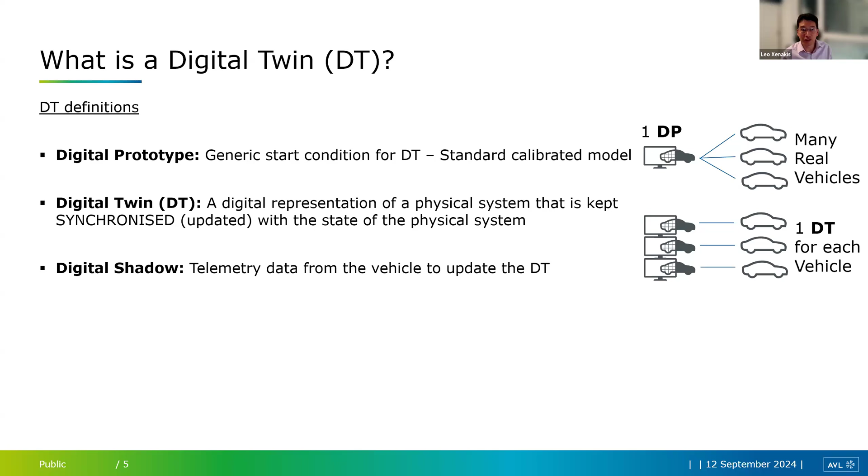And what allows this digital twin to stay synchronized with the physical vehicle is the digital shadow. This is the name we have for the telemetry data, which comes from the physical vehicle and is used to update the digital twins, keep them synchronized.

It's important here to just differentiate how we use this data that comes from the vehicles. I've kind of broadly split them into two. This is online data. This is the data that is used to perform predictions based on the current state of the vehicle. So if you want to know the current state, it's like a live link to the vehicle. And then there's historical offline data. This is used to update the parameterization of the calibration of the digital twins.

And we'll see in a bit more detail what the different steps are to get to these and how this data is used. But it's important to understand that there is this online data which is coming sort of streaming from the vehicle and is used essentially immediately to do calculations. This is like the inputs to any particular model in terms of time. And then the offline historical data, this is used to update the parameterization, or what's possibly called the calibration sometimes, of these models.

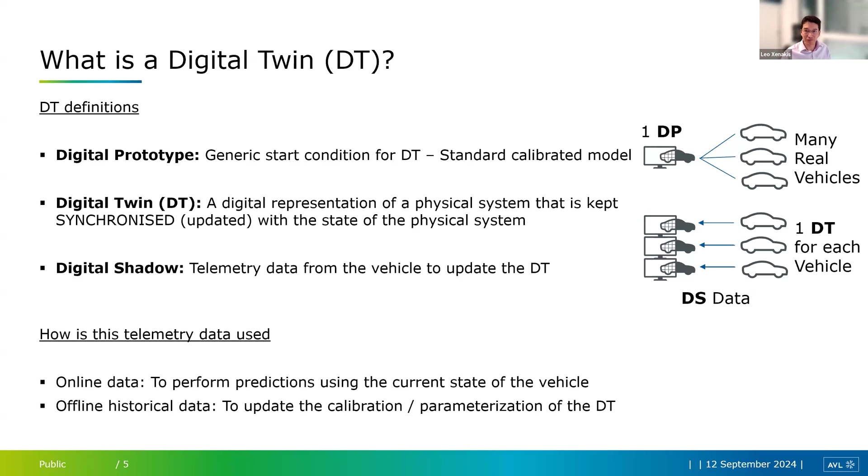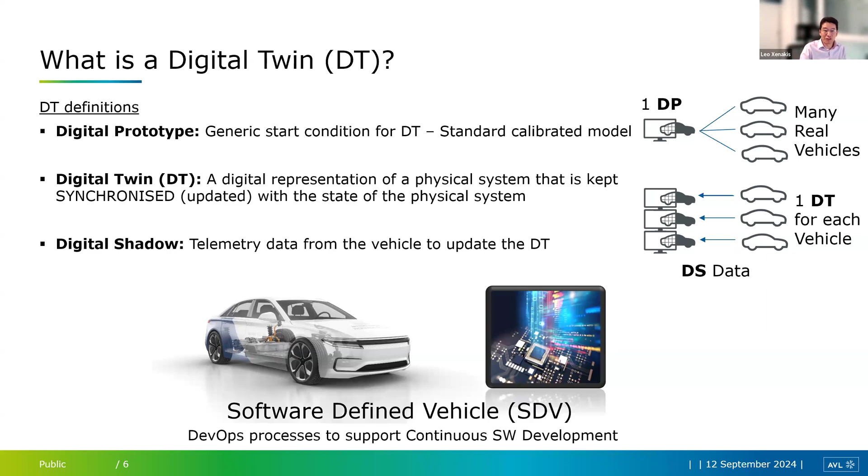And I have to mention here that this software-defined vehicle is really forming the backbone of a lot of the technologies, particularly the DevOps-related technologies, which allow digital twins to exist. And the reason for this is that this continuous updating of the software is essentially what forms the backbone of what digital twins need to be able to do. They need to take data from the vehicles and then update themselves. And this needs to happen automatically because there could well be thousands, millions of vehicles. There can't really be any manual steps in this process.

So now that we know what they are, why are we even interested in digital twins? For the purpose of this presentation, I've decided to split it into two. These fast digital twins are used for future prediction, and these high fidelity digital twins are generally used more for detailed investigation. So let's have a look at those.

The fast ones, at least in our case, are generally 1,000 times or more faster than real-time execution. Accuracy, well, we have got better in this case, but better than 5% is probably a good target. And it's generally used to predict key variables of the vehicle in the future, either for control or for management. So use cases here: look-ahead controllers. We have an example of a thermal system developed by AVL here. Drive rate is another one.

These are ones where you want to look ahead and possibly look at different strategies for the next 5 minutes, 10 minutes, and maybe simulate several of them and choose the best one. And of course, this can be done on a fleet level as well, where you have management prediction algorithms. This could be, say, taking 10 vehicles of varying ages, maybe even different specifications, 10 different delivery schedules, and seeing which one is most efficient. And of course, it can be used to predict component failures or readjust maintenance schedules, reduce downtime, all these things for which the state of the current vehicle needs to be known.

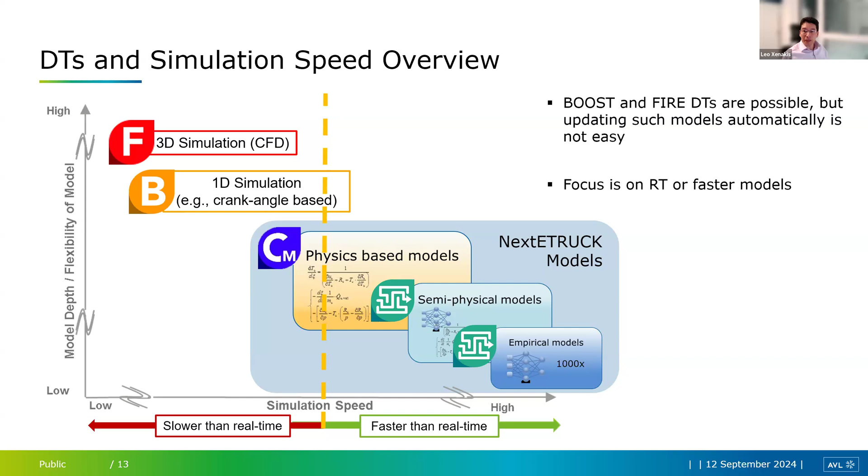Quick clarification. There's a misconception that digital twins need to be a full model of the whole vehicle, and this is absolutely not the case.

Digital twins need to only have enough fidelity, execute fast enough, and model only the systems and outputs of interest to be useful, right? So this is no different from the models that you probably currently use already. So in terms of development timeline, where do digital twins come in? Where do they fit into the overall picture?

So we start with the system definition. Hopefully you already have systems in place that do this, SysML. And then we talk about the digital prototypes. Again, this is probably close to where you are already, or what you have been doing traditionally. And for most OEMs, we really want to start using digital twins already before we go to production. I think if you've done any amount of testing on real vehicles, then even keeping track of what's happened with these vehicles and what software is on them, this can be a nightmare.

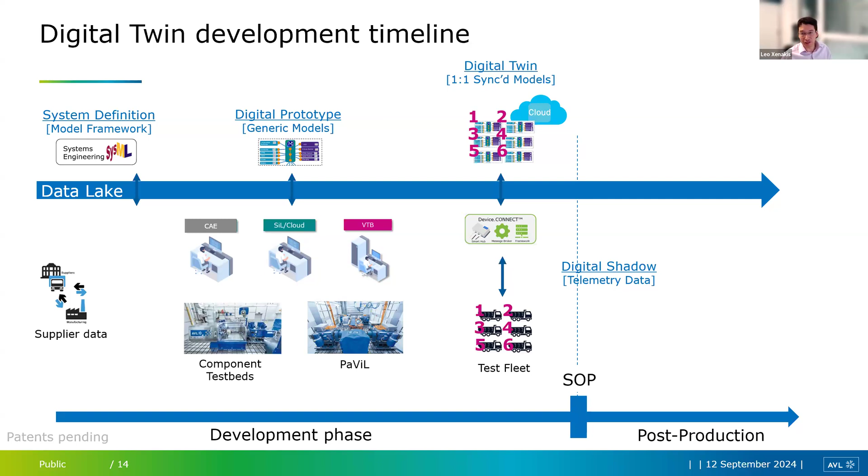And actually, if you have the framework in place to deploy digital twins, you can do things like, of course, look at the full history of the vehicles, have pipelines in place to already test in software or in SIL or HIL certain components, updates to calibrations, updates to software, all in the cloud before, and then have them deployed directly to the vehicles. Again, if you have this capability in place.

And then, of course, once you get into production, you have the ability, both from the OEM side and maybe as a service that you could sell to the end customer, to have a better overview of the state of each of your vehicles, and to do all the things that we talked about in those use cases.

Could you maybe explain the abbreviations that we have here in the middle of the screen? CAE, SIL Cloud, and VTB? Okay. CAE is computer-aided engineering. You could just say this is basic CAD and all the simulations related to the more complex, so maybe more 3D, 1D type simulations. SIL Cloud is software in the loop. It's cloud-based testing. Again, if you want extra compute, you can push a lot of these complicated calculations into the cloud. VTB is virtual testbed. This is a product that we have here at AVL.

It's basically a HIL. I've got component testbeds, I think you understand. This is a powertrain vehicle in the loop. This is where you have usually 4 dynos, maybe one simulating certain parts of the powertrain here at the front. And sometimes you can mount the whole vehicle, or you can just mount maybe just a high voltage component, whatever it is, and you can have independent control over the 4 wheels. SOP is start of production, I think.

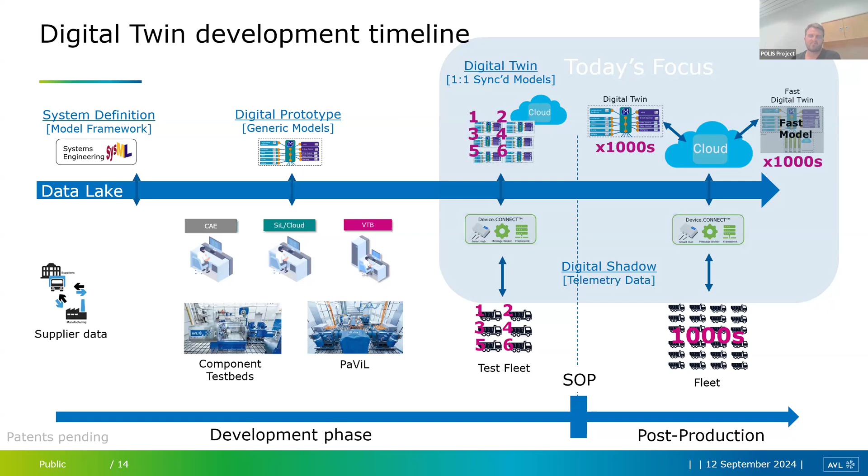Okay, those were the two questions. I think then there are no further questions, so I think you can continue to talk a little bit about our project, which is good.

Okay, so this is a 4-year project. We're about in the middle. 18 EU partners, fluctuates a little bit, as we'll see. We had 3 live demonstrators planned for 6 months at the end of this. I've grayed out Tevva here because, as you may be aware, unfortunately they went bankrupt a couple of months ago. We are looking for another partner to fill this spot, but as of yet, I don't believe we found one. And any new hardware or software required for these demonstrations is being developed in the 3.5 years previous to the demonstrators running. As part of this, a digital twin development framework and a full fleet management framework are being developed as well.

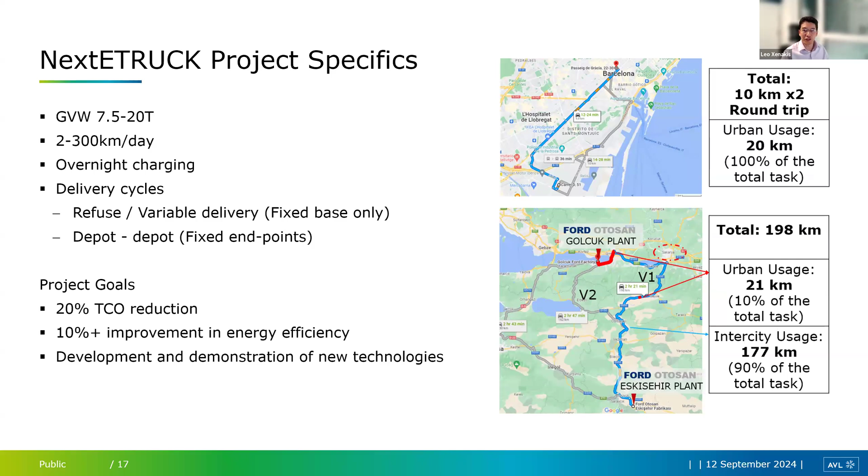Leo, I just need to interrupt you quickly. We are not seeing the mouse all the time, so maybe you can refer to the colors or use some kind of pointers or something. Yeah, that works. Here we go.

I think what you could mention also is that the situation in Barcelona with the refuse collection is not really what you would call a standard garbage truck that you see in cities, but these are large pieces of old electronics, for example a fridge, and the route is basically not fixed because the vehicle is going from the depot to collect the items and then returning again.

So we have varieties, and also, if I'm not mistaken, the trips between the two depots in the functional urban area of Istanbul are also not always the same, but fluctuating, because we decided to alter the route, even though the origin and destination of the truck are always the same. They will take different routes in order to gather further data. I'm not 100% sure if this has been clearly stated, because it is quite important to look over a longer period, and also to factor in the climate situation.

Even though Istanbul has a Mediterranean climate and we don't have huge fluctuations, at least we will see a difference between the start of the pilot, if it starts on time, which will be during the coldest months, and the end in the summer next year if we keep our current schedule. I think this needs to be mentioned briefly, so people have a better understanding of how these trucks will operate in the real world.

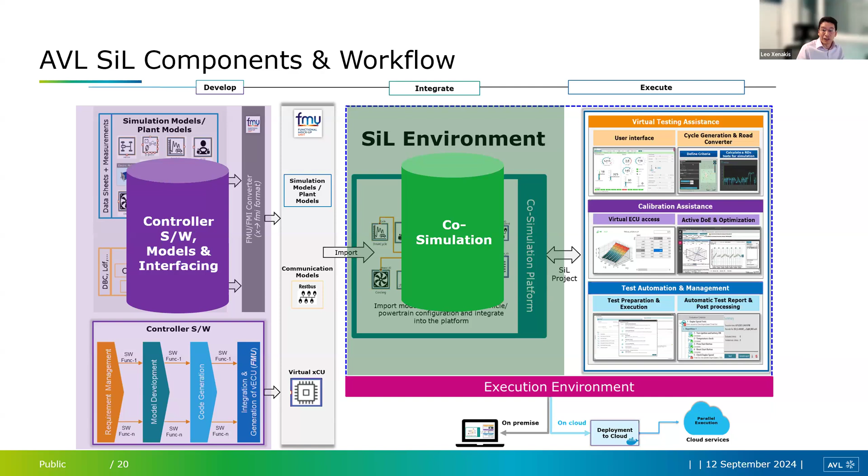And for any system like this, you also need a layer on top, which is really using, I suppose, an automation framework and also a management framework in order to be able to deploy the correct tests to the correct environments. And we see this down at the bottom. We need to be able to deploy on-premise, also into the cloud. And at least the AVL systems, they support this.

So this is where we get into a little bit more detail about exactly what the workflow for NextETRUCK is going to be. So here at the beginning, we're looking at model creation. We use MATLAB for the controllers in this case and CRUISE M for the vehicle components. We'll get a nice demo probably next time, as we're running a little bit over.

But essentially there are standard components of most vehicle types available, including for hydrogen, so fuel cells and this sort of thing, so you can quickly pull together models of the vehicles. And in this particular case, we're combining them into FMUs. And the simulation engineers sit essentially between these two.

And the co-simulation environment, this is Model Connect, especially designed with certain useful features that are not available in some of the other simulation tools, including the ability to not have to share some components, but still allowing simulations to run in the cloud with separated access rights.

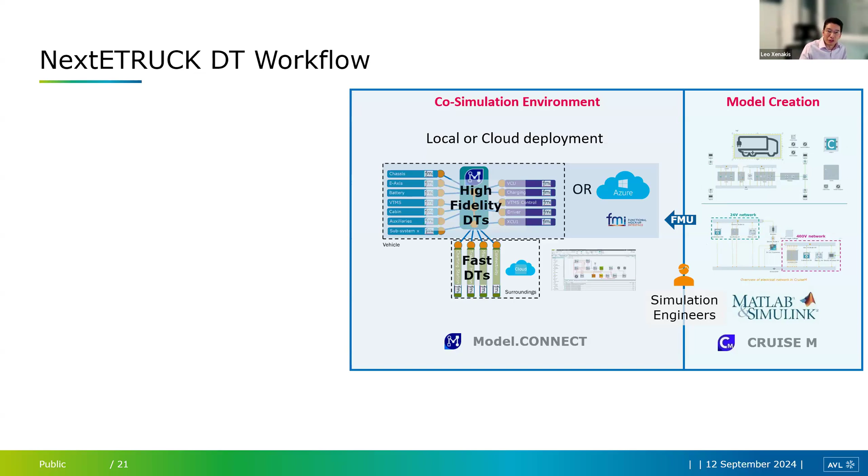But essentially, these are then converted into high fidelity digital twins, and some other tools are used to create the fast digital twins. And these are the empirical or semi-empirical models, the ones that need to run much more quickly. And this can be done very quickly and to some extent in an automated way using the tool Cameo.

And we have two types of management in terms of the parameterization and the models themselves. There are different requirements for each. We'll get into why this is, but I think it's generally accepted now that you need to handle the models and the parameters separately. And we do the model management in GitHub and the parameter management in CRETA.

And here again, we have the end users really only interacting with these testing tools here, so they don't need to see the complexity behind it. I think sometimes it's extremely useful because generally the people doing the testing are not the people making these models and everything. And as we've seen with many customers, just this hurdle of having to install or even think about using some of these simulation tools puts a lot of engineers off, and a lot of models tend to then go unused.

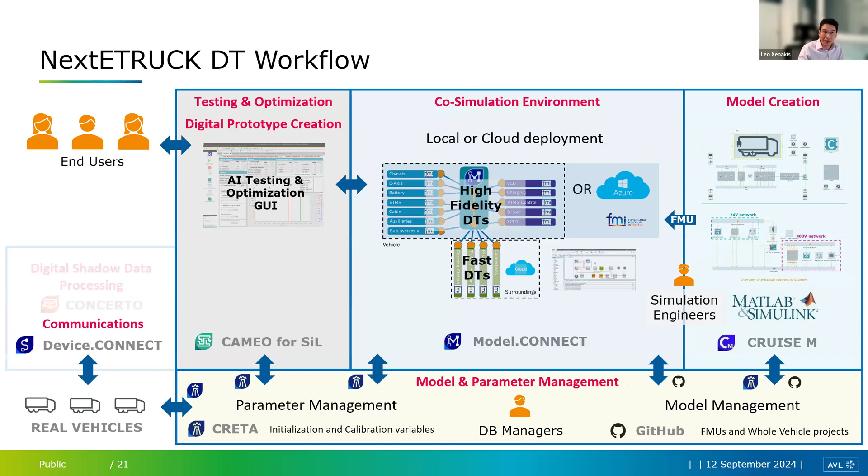So once the vehicles are available, then again, the same places where the parameters are managed can still be used to bring the latest DTs, models, parameterizations down to the vehicles. We have an AVL product, Device Connect. This allows the communications up to the cloud. We use Concerto for post-processing. So this data is taken into the cloud, and there's going to be a lot of it, obviously, and any processing scripts can be automated here.

Again, using the longer term data, we can automate the creation and update of these models with some AI-based stuff. And this isn't a real buzzword in this case. The AI components within Cameo have been worked on for the last 12 years, and this is what allows, with minimal human input or none at all, the creation and update of models. And we'll talk a little bit about this probably in the next presentation, but there is this DevOps pilot program which has been developed together with Microsoft.

This gives you a nice clean interface so that, again, the end users don't need to see any of the complexity of the tools behind. But of course, it's important that each of the tools themselves do have nice interfaces for the expert engineers in each of those areas. But there must be the ability to then essentially automate the workflow that they're using in order to execute certain things.

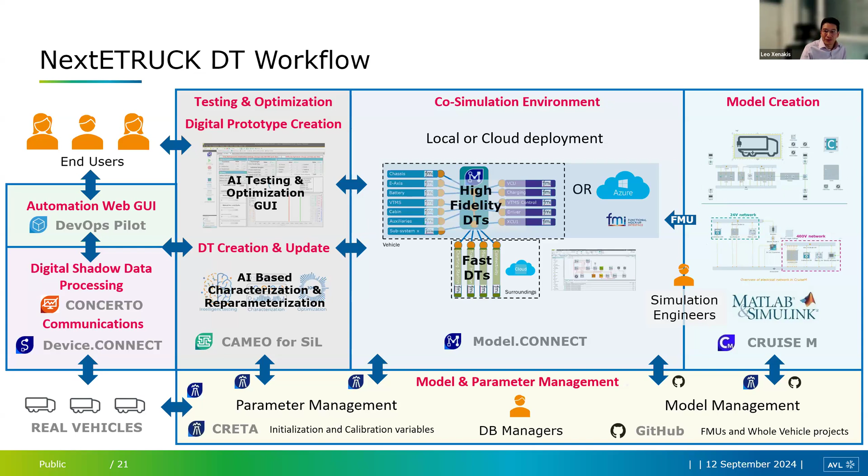So I'd very quickly like to cover, so this high fidelity P2 hybrid truck model is the basis of the NextETRUCK models that I'm going to show you soon. But I just wanted to quickly cover some of the capabilities that we're seeing here, because essentially we don't just cover eTrucks. We have the ability to look at any number of different hybrid configurations.

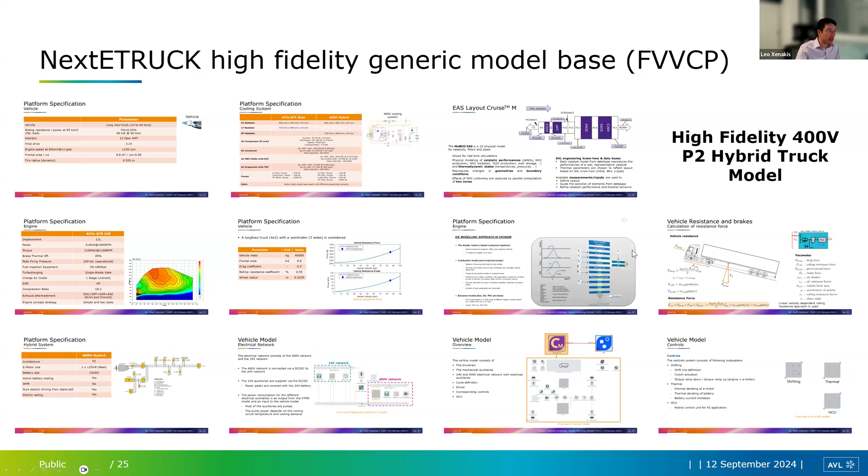And of course, in many respects, modeling engine-related behavior is more complicated and allows for more optimization possibilities when combined with e-motors as well. So many projects done on this, and there's a few screenshots here based off of the demo example. There's a presentation we can link to as well. It was given 6 months ago, where we go through all of the capabilities here, but I'd like to quickly

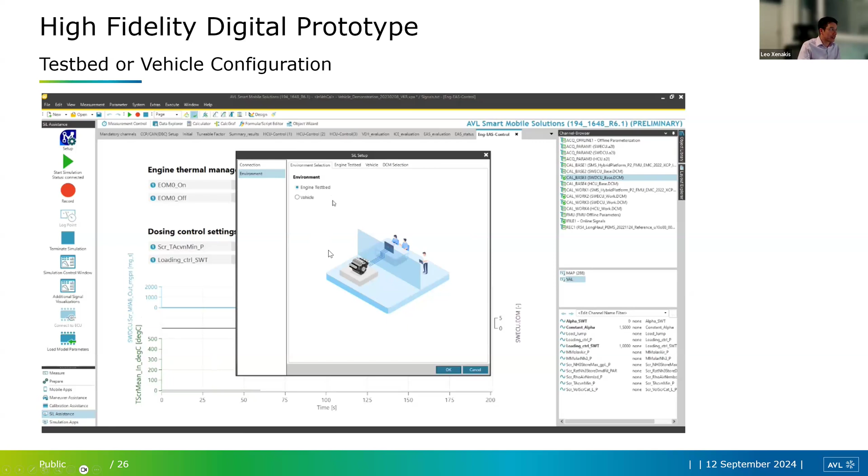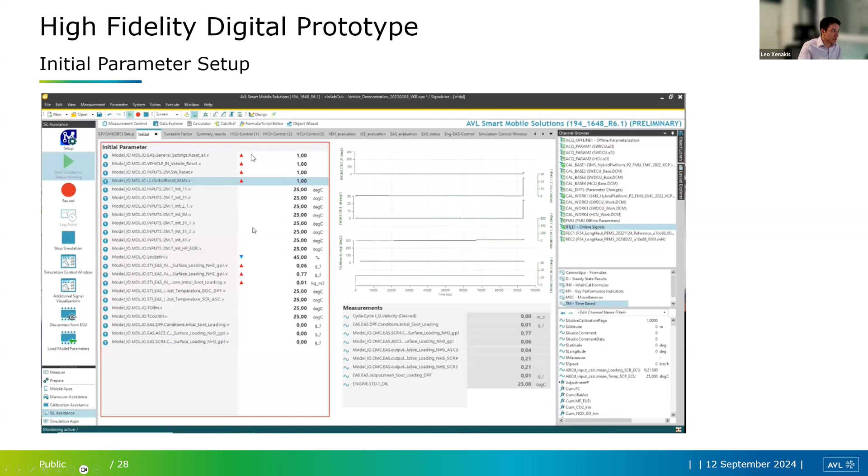just cover that. For example, right at the beginning, you can set the simulation up as if it was running either on an engine test bed or on a vehicle in this case. And again, without opening the simulation tools, you can choose which FMUs are used, or swap them out if you want to, even manually. And here we have initialization parameters for the simulation. Again, it's nice that you can see whether things have been changed from the default values.

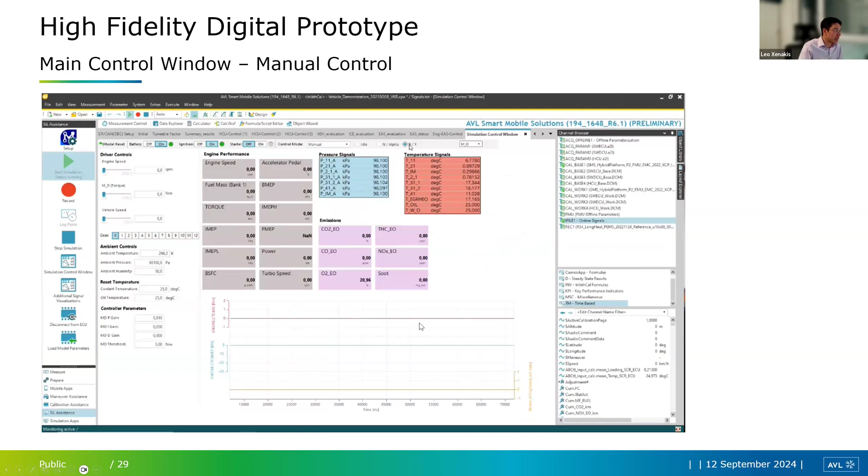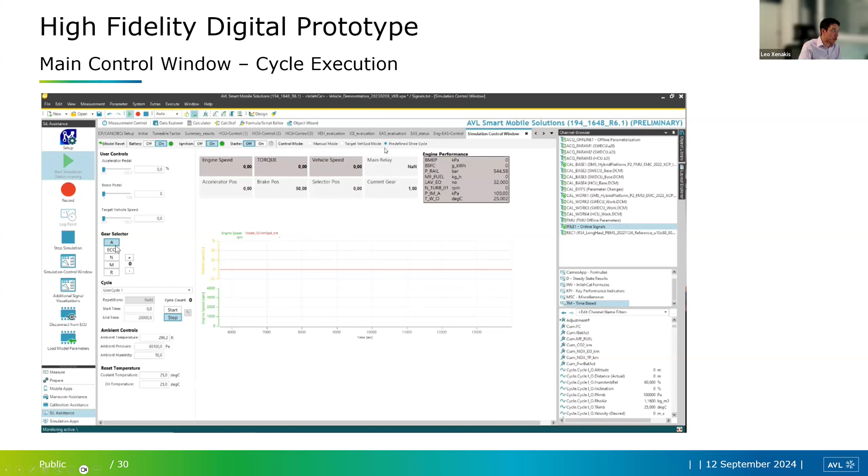Here we have a manual control window. So this is like you're essentially on a test bed. You can choose gears, vehicle speeds, torques, engine speeds, and see what effect this is having. There's another one, which is like a dashboard for cycle execution. This again allows you to choose certain gearing or modes, or go into auto and run any number of cycles.

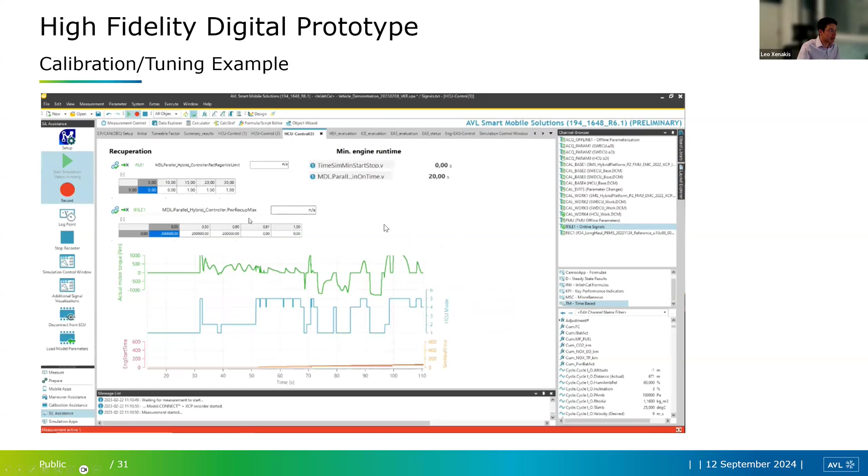Here, this is more of a parameterization or a calibration window. You can change maps, curves, single variables, again, monitor their effects. And yeah, there's good visualization plugins here that allow you to either look at just the data now, or you can compare it against previous tests or against the default test, and also quickly produce reports or perform further calculations.

So yeah. I have a question. Sure. I was just about to interrupt you, but you stopped at the right point. Could you go back one more slide, please? Yeah. This one? For example, here, what kind of curves do we see here in this example? Just so people know. What would be the example here?

So, well, here, this is really just an overview. So we're seeing vehicle speed at the bottom, we've got accelerator position next up, together with brake pedal position, it seems. And then gear, and the brake pedal position is above. And then we also have this state of charge. So you can see it's just above 40 at the beginning, and it's dropping to just below 40%.

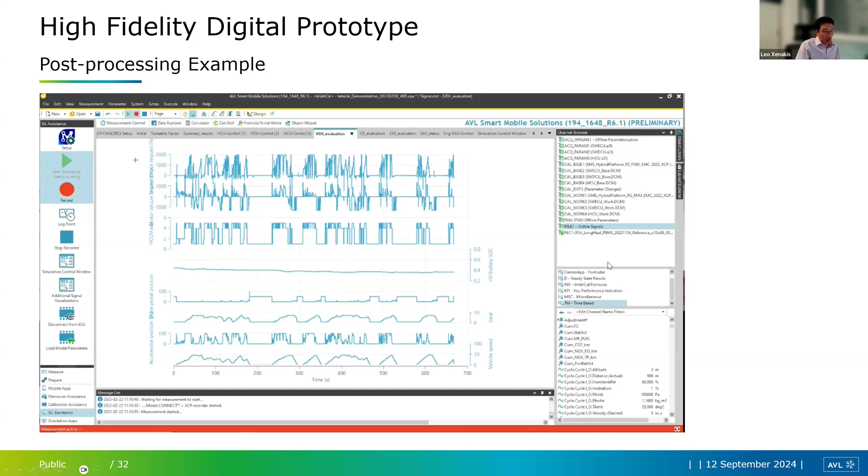So basically anything that you have logged or have as a potential output of simulation, you can plot on here, and quickly see what the vehicle is doing, or what the simulated vehicle is doing. I'm about to quickly switch over to show this.

And there's also another question from the last part when you were just starting, so I didn't want to interrupt you. He is asking, what do you mean by thermal modes in the other slide? Is this related to the cabin heating or something else? So this is more related to the control mode of the thermal system. For example, in this actual case, we've kind of done away a little bit with thermal control modes, but generally you tend to have thermal control modes depending on what state your vehicle is in.

So say, for example, that your battery is colder than you want it to be, your e-motor is hotter than you want it to be, and your ambient temperature is a middling sort of temperature, in which case you might go into, I don't know, mode 3, which then will move the pumps and the valves in order to try and bring some of that excess heat, say from the e-motor, to heat up the battery, for example.

But then you might have a different mode, say mode 5, which is maybe doing the opposite. And actually, generally, you'll be looking at 3 or 4, maybe 5 different components where you've got heat exchangers and things like this. And it's just easier to parameterize or to have control modes, so you know broadly what the system is trying to do in that particular case, where it's trying to take heat from and where it's trying to send it to.

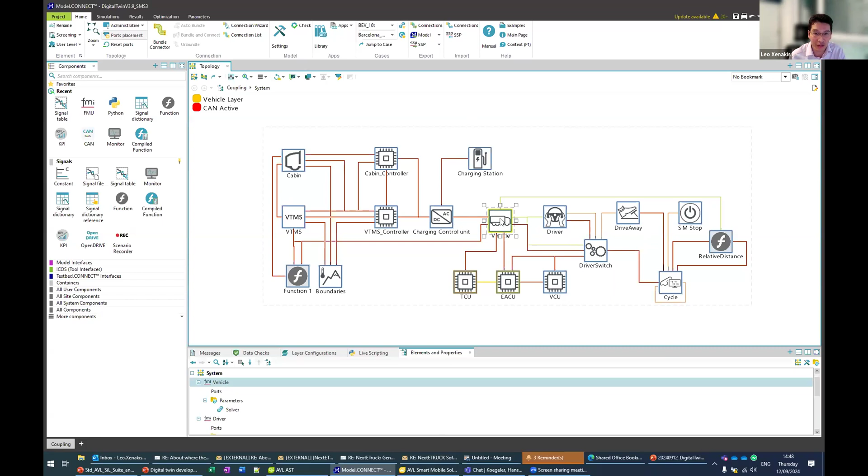Is there anything else, or I think we need to speed up here. So essentially, this shows the model, which is in Model Connect. We'll show the insides of these next time, in how they were made in CRUISE M. These are already turned into FMUs. You can also set them up as XCP slaves. We won't cover what that is here. If you know what that is, you can basically access them like controllers. You can look at ports and things. You can bundle them to, again, make it look a little bit neater.

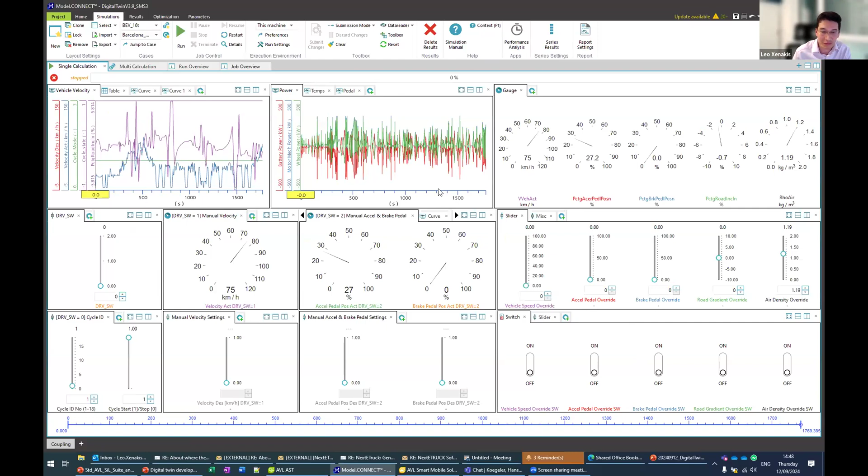And I've created a very simple dashboard here, but again, just like I was showing in the other tool there, you can see how the simulations are proceeding. But we prefer to use a separate tool, which is much more familiar to people working with vehicles. It used to be called SMS, Smart Mobile Solutions. Now it's integrated into CAMEO. Let me quickly connect, and let's at least see it running quickly.

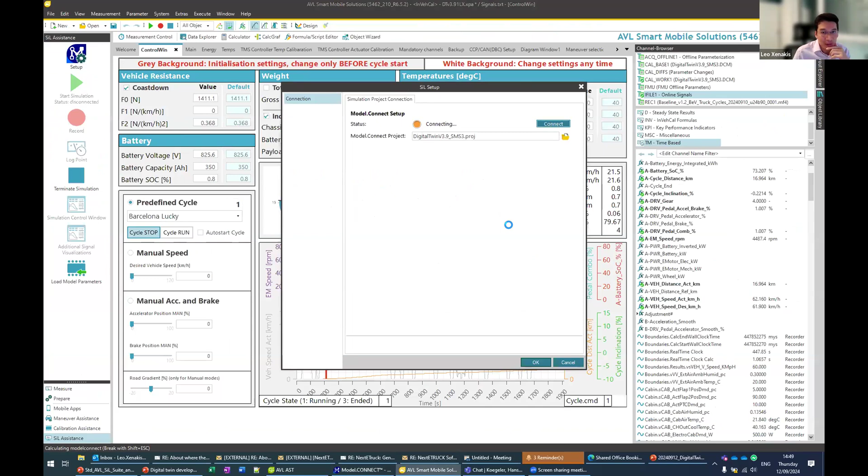But while this is connecting, here you can see actually you can change different configurations, and this will change which FMUs are used, for example. So this is again the ability, without opening the underlying modeling tools, to swap out FMUs as long as the inputs and the outputs are compatible. So we OK this.

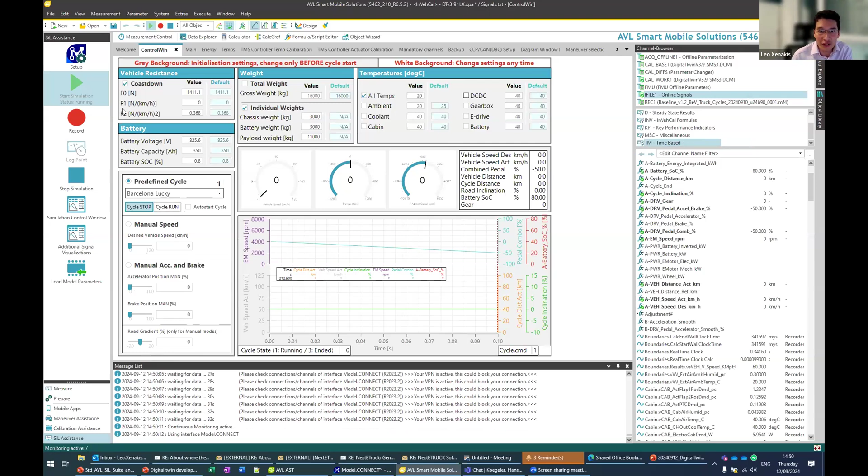So we run this. So here you can see there's a bunch of predefined cycles, a very flexible interface here. You can really make it suit whatever you want, whether it be a cycle or manual running or whatever it might be. And we have the ability also here to switch between these three modes: running a cycle, setting a manual speed, or manually moving brake and accelerator pedal positions. And also the ability to manually set a road gradient here. We won't change any of them here, but you have the ability.

So these are the gray initialization settings. You can set things like the frontal area, etc., determining the resistance of the vehicle overall as F0, F1, F2. And you can set some battery parameters, the weight, and also the starting conditions of various parts. So you can have everything set to one temperature, or you can set individual temperatures for each component as a start temperature. So we start the cycle. You can see it's getting going.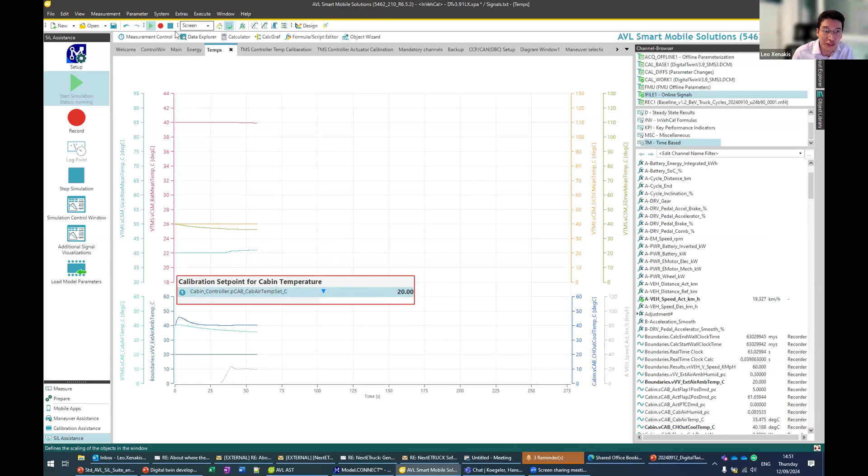And any calibratable variables, again, you can just set up any windows you want. Here, for example, we have the example of setting a cabin temperature, but again, as before, you can set a different temperature. You can see which way you've adjusted that temperature very easily. And maybe I should also show that we can set a manual speed, for example. So we like to call this a sandbox; it allows you to play with the vehicle as if it was on the road, or maybe on a test bed. Yeah, this is preferred.

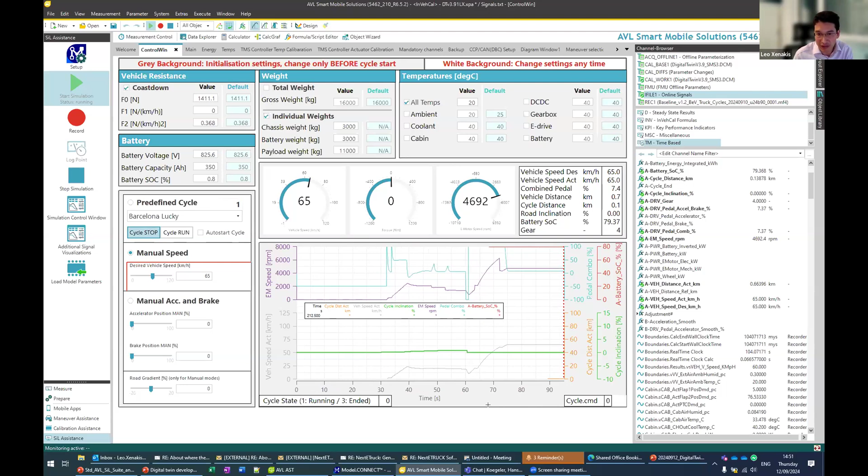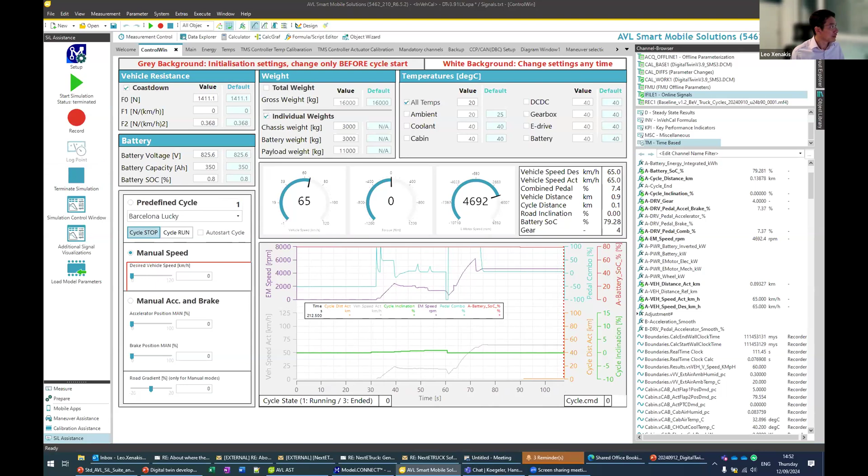You can do it manually, but you can also automate, so you can access all of these commands via API and automate any particular test you want to run. And again, at the end of this, you can create reports automatically. So we had to run through that pretty quickly. Let me just try and get through this. So I don't know if there's any other questions.

Hello? Oh, sorry. No, right, there are no further bits. Okay, good. Yeah, we've got a few slides just to finish off. Yes.

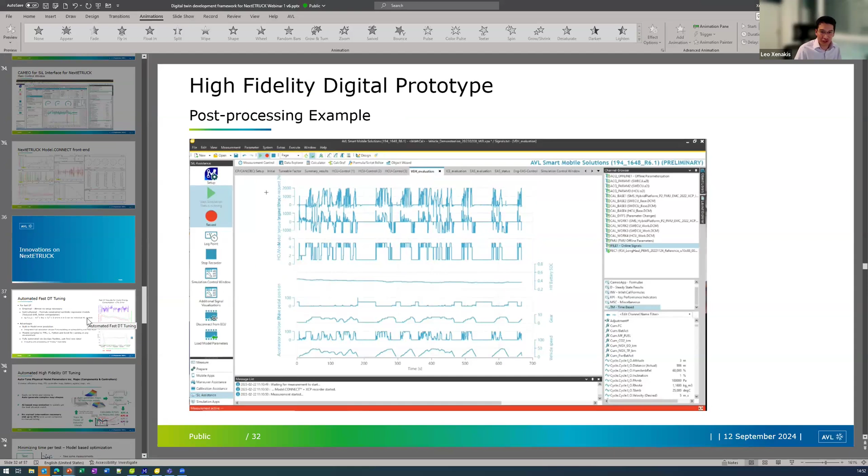So again, I won't cover this in too much detail because I think this is going to be focused on more in the next presentation, but we will look at how we create some of these models. And we've seen already that there's very good error. So we basically parameterized the fast running DTs by running certain predefined cycles that have a very good coverage of the input and the output space in terms of where the vehicle can run and all the conditions it can run in, so temperatures, this sort of thing, but also torques, accelerations, braking, whatever it might be.

And then we use different cycles to try and see how good the prediction was, and already we're well within 3%, even with quite extreme conditions. Usually it's much closer to 1%. And you also have the ability, if you would like, and we'll show this again in the next presentation, to play with the models to see actually if you put in various inputs, how it affects the outputs.

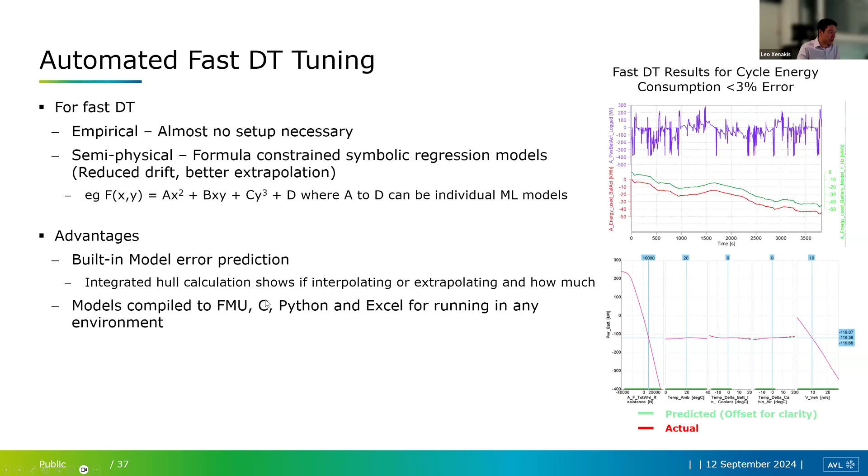So some of the advantages that we see here, there is a built-in error prediction. So you can see how much your model is interpolating, extrapolating. This can be quite useful when you're not quite sure how much you can trust the output of the models that you've created. You can export to many different types of build, into many different containers. And of course, if you want to automate any of these processes, including the model creation, you can.

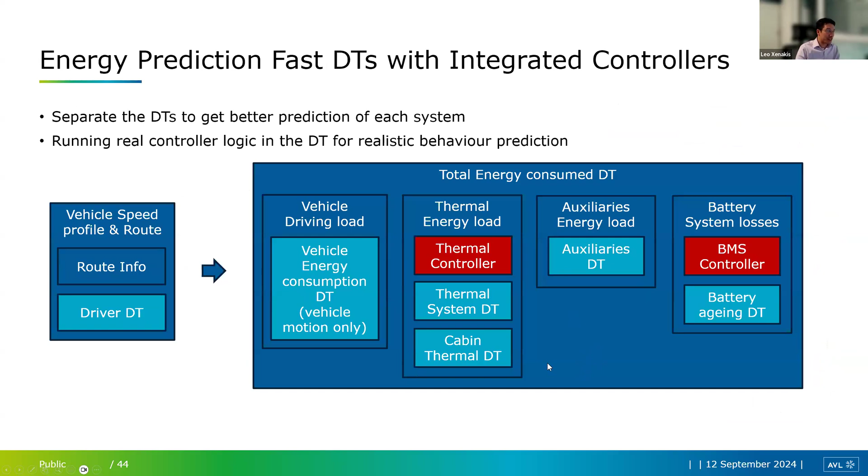This one I think we'll skip over, but essentially we tried to split the model creation into various parts in order to help the automation process, but also to end up with a better prediction at the end in terms of when we run the model. We'll cover this next time.

And we are an official development partner for this product, which is going to be sold soon through Microsoft themselves as well. But yes, this hopefully allows us to combine the benefits that we have, the automotive knowledge on our side, and of course the software development from Microsoft's side.

Okay. Well, let me just give the summary and then look ahead, and then we'll take questions right at the end. So I think Nicholas has already said we have basically this to look forward to next time. I hope you will join us again.